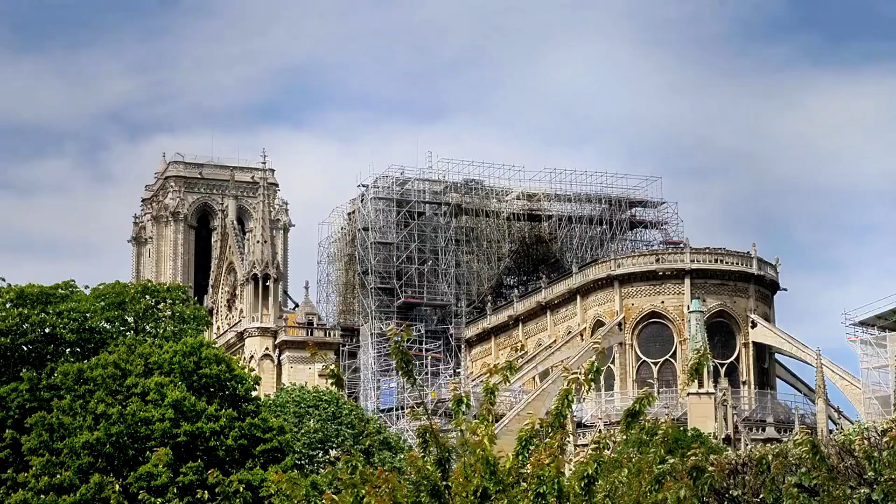The fire and immediate response. The fire broke out in the attic of Notre Dame at 18:18 local time. Within minutes, the cathedral's wooden roof and spire were ablaze. Firefighters battled the inferno for 15 hours, facing numerous challenges. The fire alarm initially directed guards to the wrong location, delaying the response.

The cathedral's height and medieval architecture made access difficult. There was a risk of structural collapse, particularly of the bell towers. Despite these obstacles, firefighters managed to save the main structure and many priceless artifacts. The fire was declared fully extinguished on April 16, 2019.

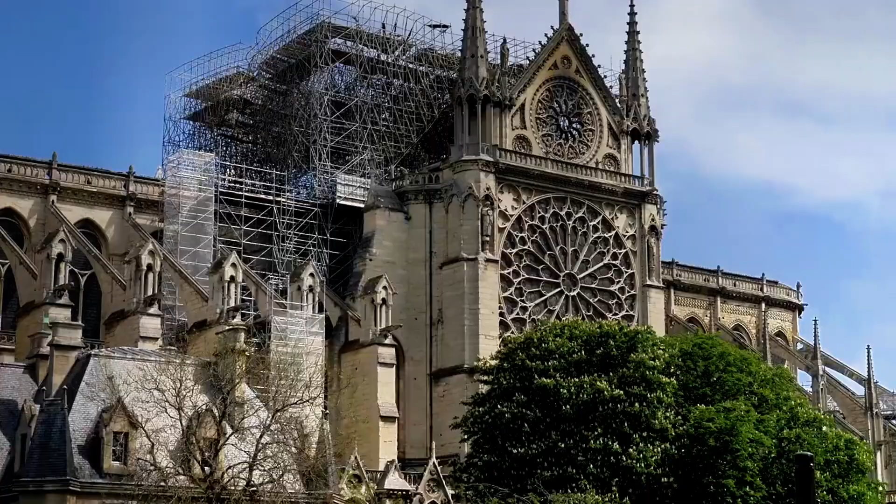Damage assessment. In the aftermath of the fire, experts conducted a thorough evaluation of the damage. 1. Roof and spire. The wooden roof framework, known as the forest, and the 19th century spire were completely destroyed. 2. Stone vaulting. About 15% of the stone ceiling vaults collapsed. 3. Windows. The heat damaged some of the stained glass windows, but the famous rose windows survived.

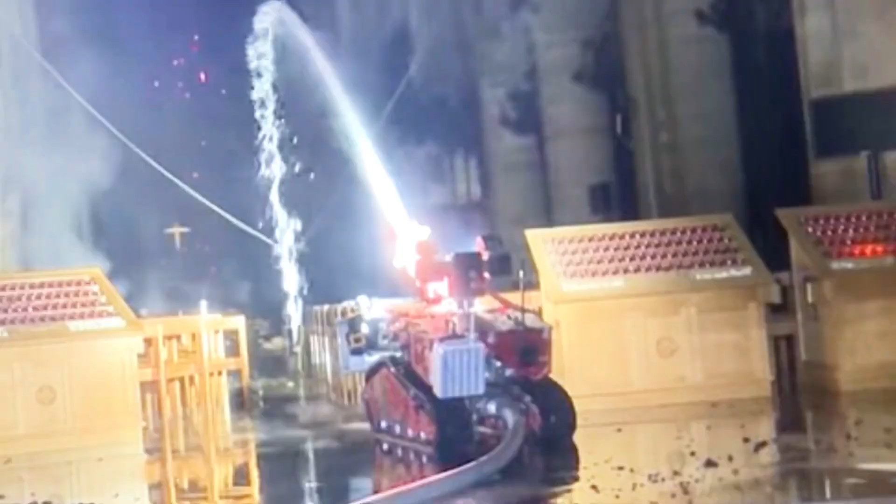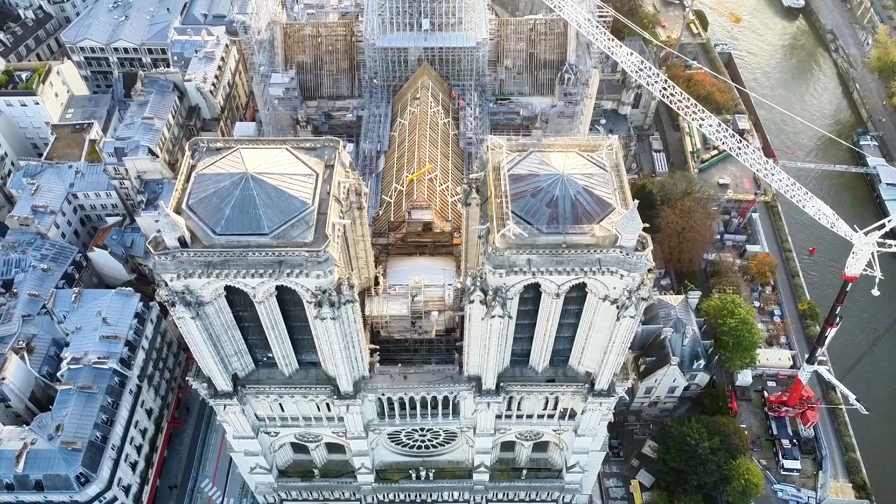4. Interior. Water used to fight the fire caused additional damage to the interior. 5. Organ. The grand organ suffered water damage but was largely intact. 6. Artifacts. Many relics and artworks were saved, including the crown of thorns and the tunic of St.

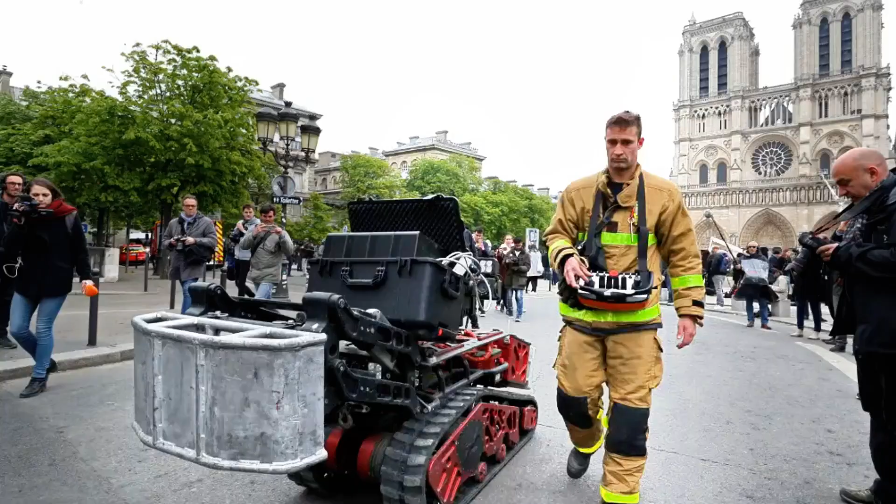Louis. The restoration plan. French President Emmanuel Macron vowed to restore Notre Dame within 5 years, setting an ambitious timeline for the project. The restoration process was divided into several phases. 1. Securing and stabilizing, 2019 to 2021. Removing debris and stabilizing the structure. Installing temporary wooden arches to support the flying buttresses. Erecting a temporary roof to protect the interior from weather damage.

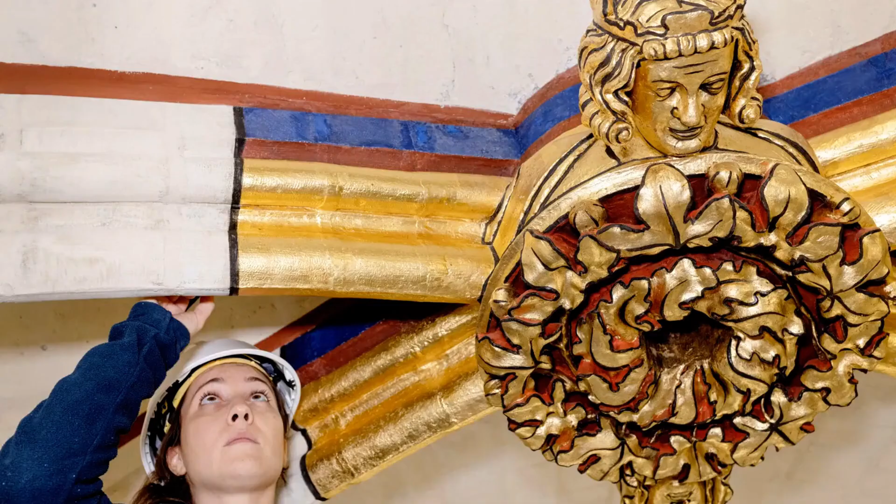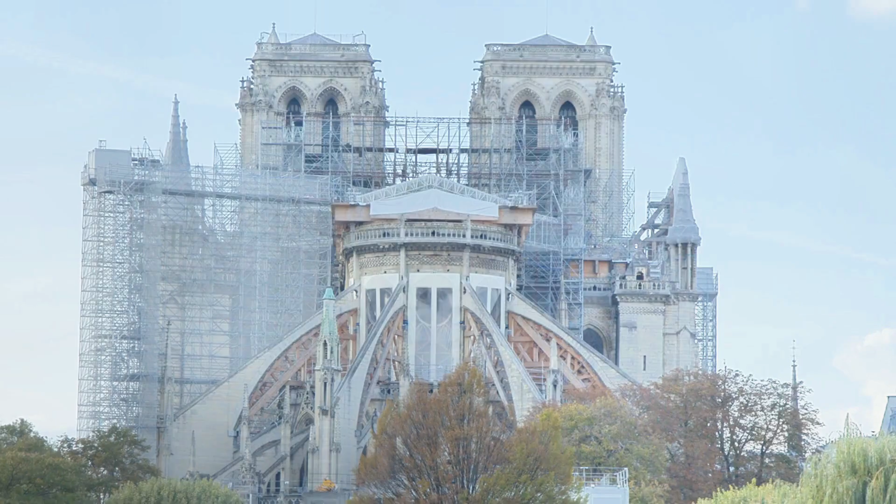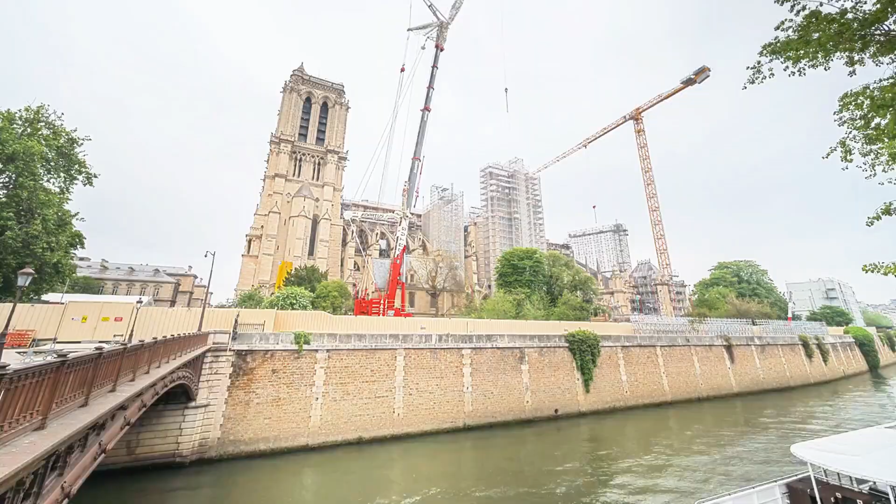2. Cleaning and decontamination, 2020 to 2021. Removing toxic lead dust released by the melted roof. Cleaning the interior stonework and artifacts. 3. Reconstruction, 2021 to 2024. Rebuilding the wooden roof framework using traditional techniques. Reconstructing the spire as an exact replica of the original. Restoring damaged stonework and vaults. Repairing and cleaning the grand organ.

Innovative techniques and challenges. The restoration project employed both traditional craftsmanship and modern technology. 1. Experimental archaeology. Carpenters used medieval techniques to recreate the wooden roof structure, providing insights into original construction methods. 2. Material selection. Around 1,300 oak trees, aged 150 to 200 years, were carefully selected from French forests to rebuild the roof and spire.

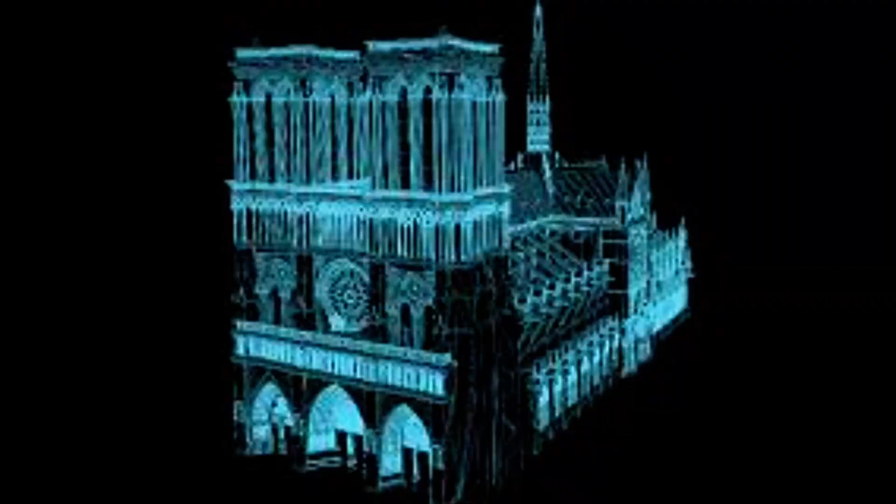3. 3D scanning. Advanced 3D scanning technology was used to create precise digital models of the cathedral for restoration planning. 4. Robotic assistance. Robots, like the Colossus firefighting robot, were employed for debris removal and environmental monitoring in hazardous areas. 5. Lead contamination. Extensive measures were taken to remove lead dust and prevent further contamination, both inside the cathedral and in surrounding areas.

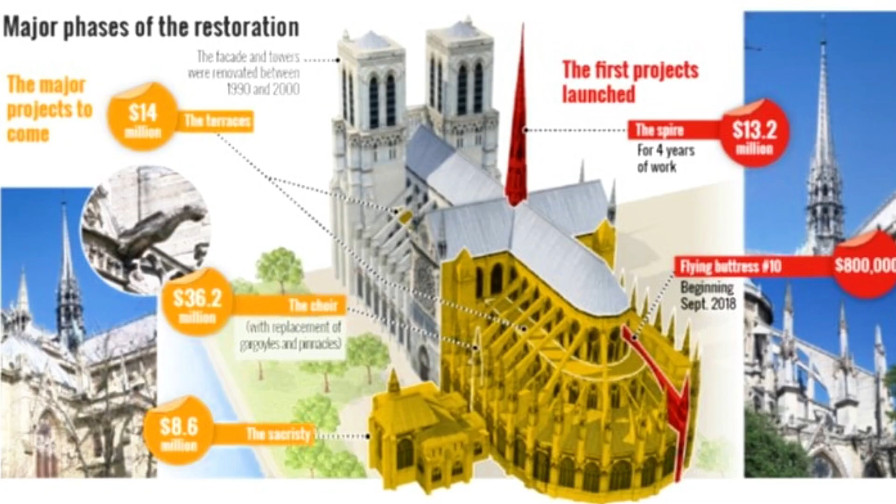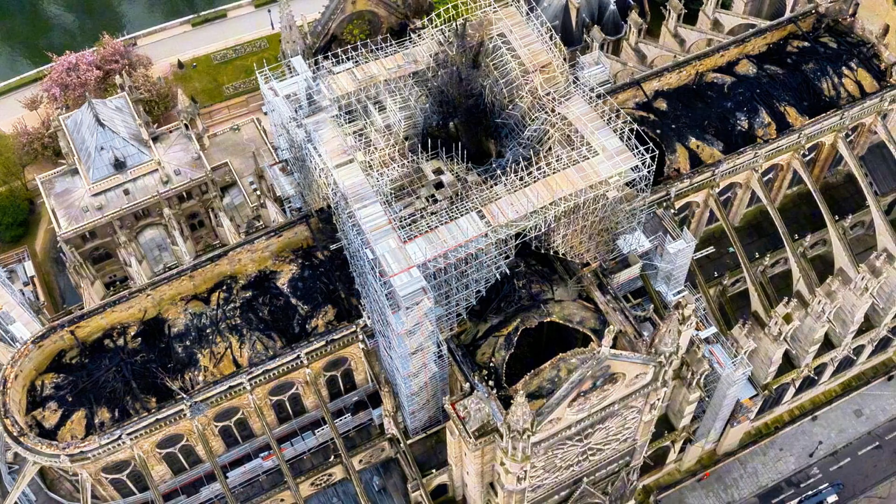Funding and management. The restoration project saw an unprecedented outpouring of financial support. Over 825 million euros were raised from more than 300,000 donors across 140 countries. Major donations came from wealthy individuals and corporations, with some pledges initially delayed pending specific restoration plans. The total cost of restoration was estimated at 760 million euros, but the project ultimately raised over 895 million.

A public institution, Rebuilding Notre-Dame de Paris, was established to manage the restoration process and funds. However, there were calls for greater transparency in the use of donations, particularly regarding the institution's operating expenses.

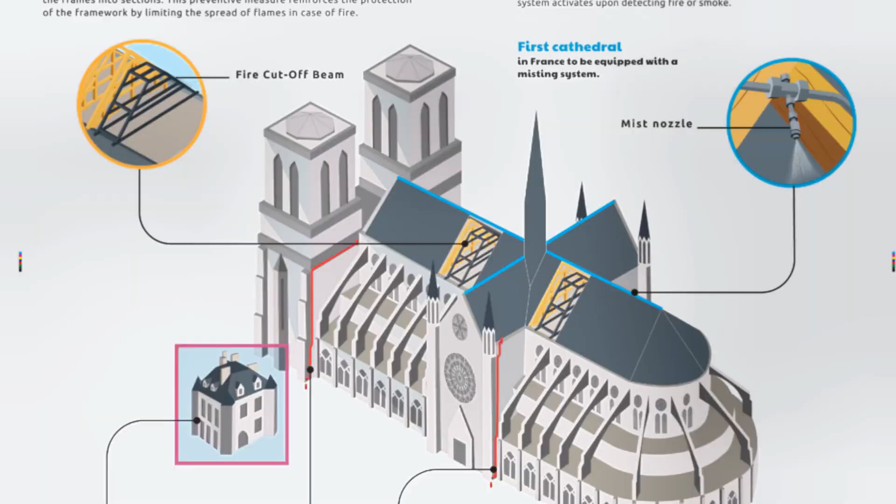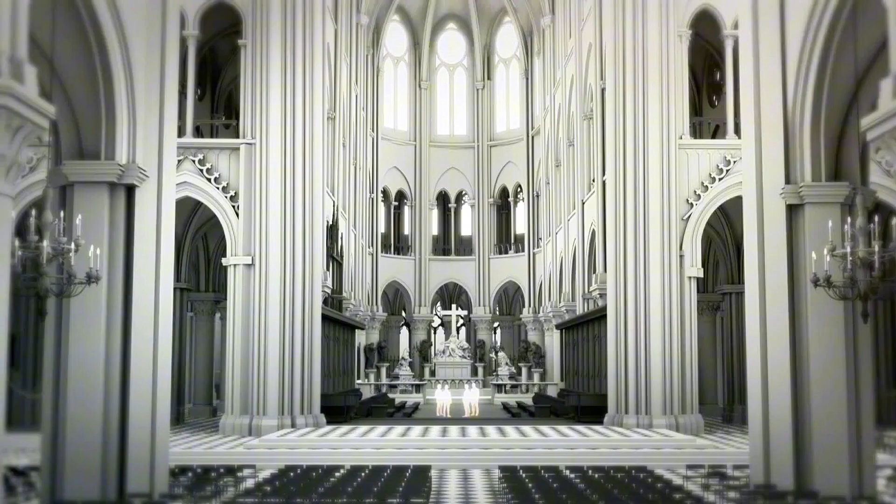The journey to reopening. As the December 7, 2024, reopening date approached, final touches were made to the restored cathedral. Installation of new fire prevention systems, including sprinklers and improved alarm systems. Completion of interior restorations, including cleaning of stained glass windows and stonework. Reinstallation of artwork and religious artifacts. Final structural inspections and safety checks.

The restoration of Notre-Dame Cathedral has been a monumental undertaking, combining centuries-old craftsmanship with cutting-edge technology. It stands as a testament to human resilience, international cooperation, and the enduring power of cultural heritage. As Notre Dame prepares to welcome visitors once again, it does so not just as a restored building, but as a symbol of rebirth and the triumph of human spirit over adversity.